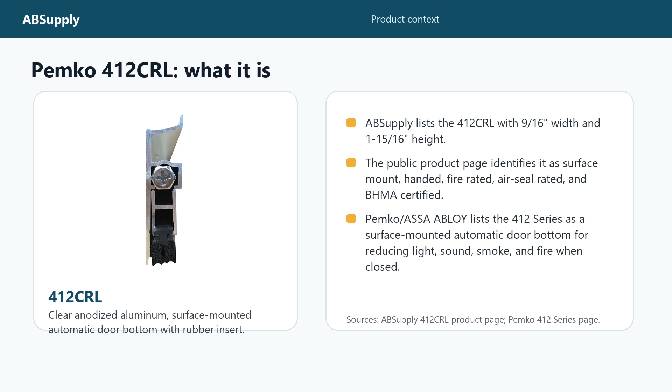I guess here, let me see what the instructions refer to as. The instructions say, yeah, it wouldn't let me put the plunger assembly back into the casing, like the surface mounted casing for the door, because there's no screw hole in the reverse hand option.

If that makes sense. Are you installing this on the push side or the pull side? Push side. It's a left-hand door. Okay, so it's a left-hand door, and you're installing it on the push side.

So when you hold the device up in front of you, is the bolt on the left side or the right side? On the right side. Okay, so you've got to reverse the hand of that.

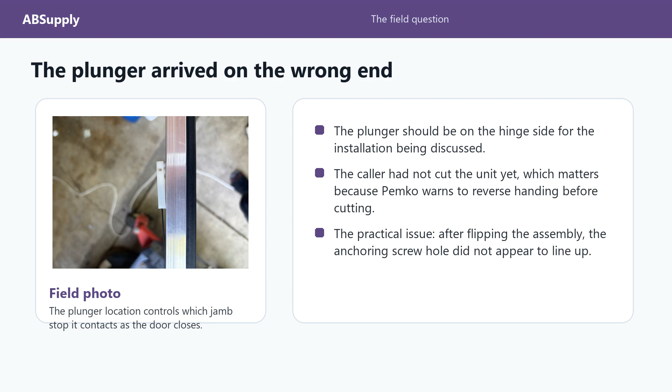Yeah. I slid it out of the housing plate, but when I reversed it, there was no screw hole on the opposite side of the plastic piece to screw it into the actual faceplate, so it doesn't move. And I'm not really sure how to assemble it in the reverse hand.

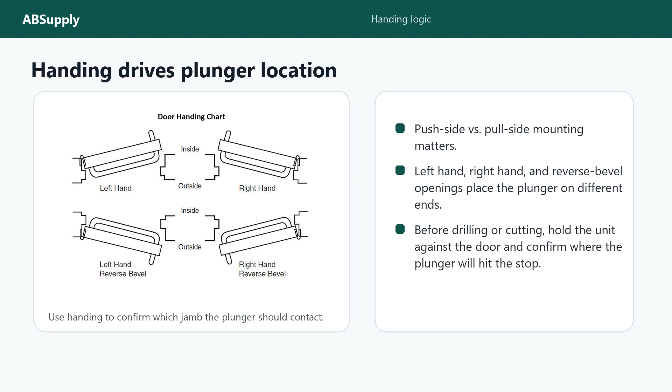I could send pictures if it makes that easier for you to understand what I'm talking about. I'm not really explaining it very well. Well, yeah, I would love to see photographs. At the end of the day, I know what a 412 looks like. Well, I think I'm just wrong. That's what I'm saying, I'm not really explaining it. Hold on, let me go inside real quick.

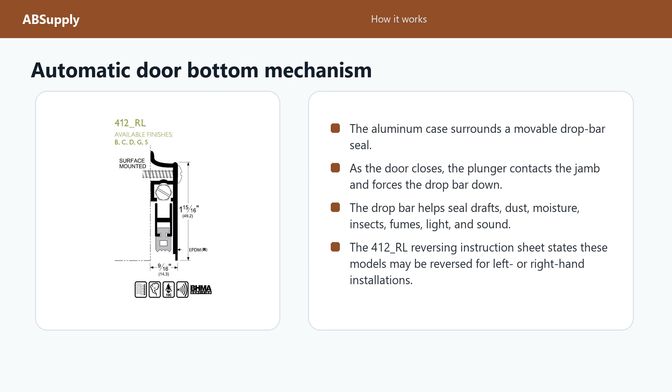So have you cut this item to length at this point? No, so I just got it out. One second, I just got the unit here. To make it much easier from this. Okay, here we go, I got it now.

So I have the faceplate and the actual actuation plunger and the spring and stuff separated. So when I go to reverse it and slide it into the housing, the plastic piece that screws in normally isn't there to screw in. I'm not sure why though.

One second. A video I can look at, because the instructions, yeah, not that I know of specifically on reversing this. I don't know if I have reversed this or not.

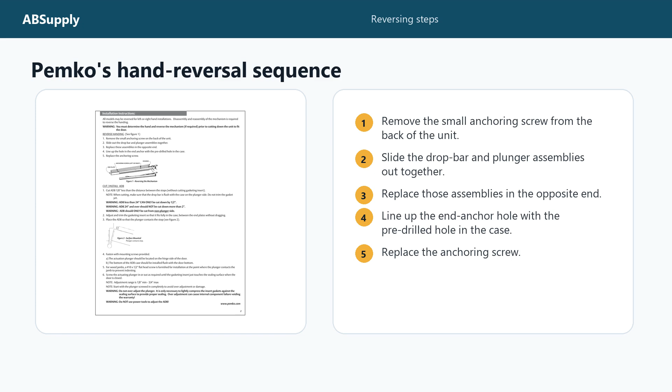Yeah, so whenever you reverse it, the way it came is it slides into the body. It just comes installed with the plunger on the right side of the unit when you're facing it installed correctly. Yeah, and when I took it out to flip it in the reverse option, the screw hole is not there to screw it back in the reverse orientation.

So on the back of the unit, there's a screw that holds the entire removable horizontal assembly in place, the anchoring screw. Yes, and now when I remove that and flip it in the reverse position, there's not a screw hole in the reverse position to screw into there, if that makes sense.

In the housing or in the drop bar assembly itself? The drop bar assembly itself, the plastic piece, it has a screw hole, but it's not available in the reverse position. I mean, I guess I could drill a hole through there and try that.

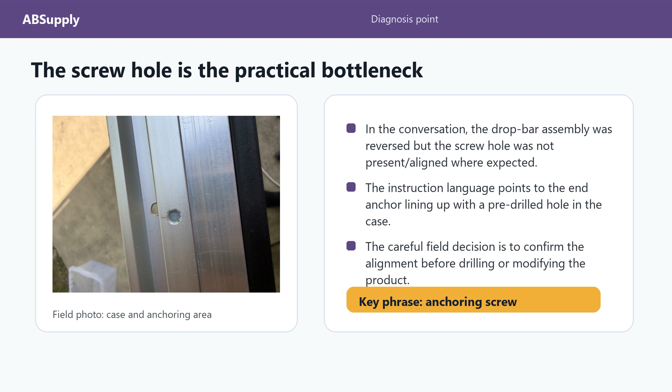Yeah, that's obviously the first thing - if they didn't drill a hole through it in order for it to accommodate that screw when you flip it over, yes, you're just going to need to accommodate, you know, putting that screw into there is the bottom line.

So remove the small anchoring screw in the back of the unit, slide out the drop bar and the plunger assembly together, replace the assemblies in the opposite end, line up the hole in the end anchor with the pre-drilled hole in the case. So you're saying that they just didn't pre-drill the hole in the case?

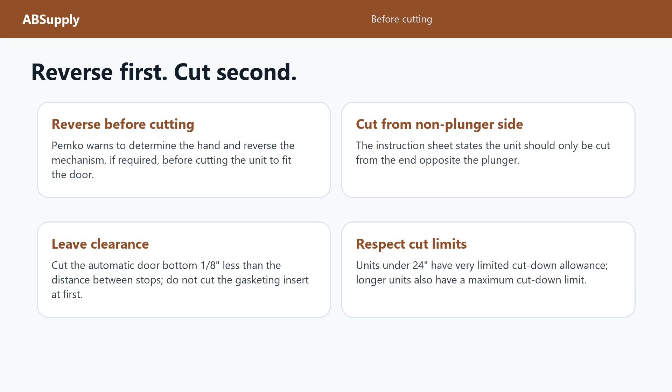I guess so. Yeah, okay. Yeah, right, yeah, so that's a bit of a drag. I'm pretty sure it's on it.

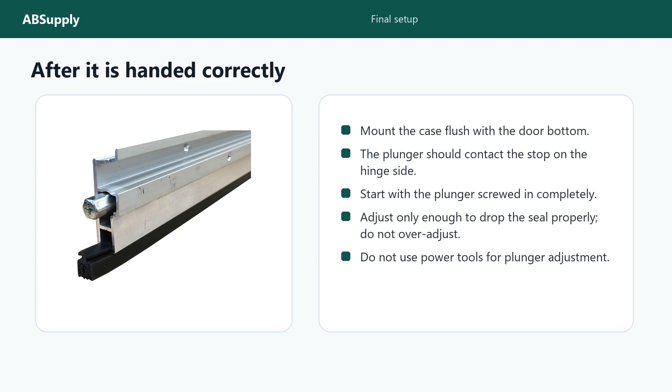Okay, and for installing it, the plunger has to be on the hinge side, and I think I got it now. Yeah, I think I got everything. I think that's all my questions. I think I understand how to get this installed here. So it's just a matter of, hey, drill a hole.

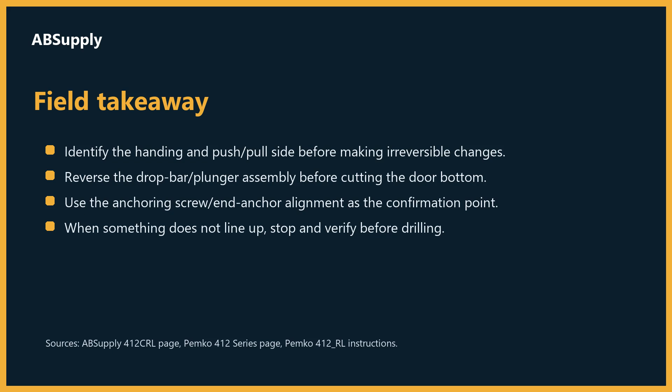Yeah, the reversing - I just don't want to permanently damage the product before asking, you know, because I don't really do much construction. I just wanted to make sure, verify. Yeah, that would be how I would proceed. Yes, sir, all right, thank you very much.